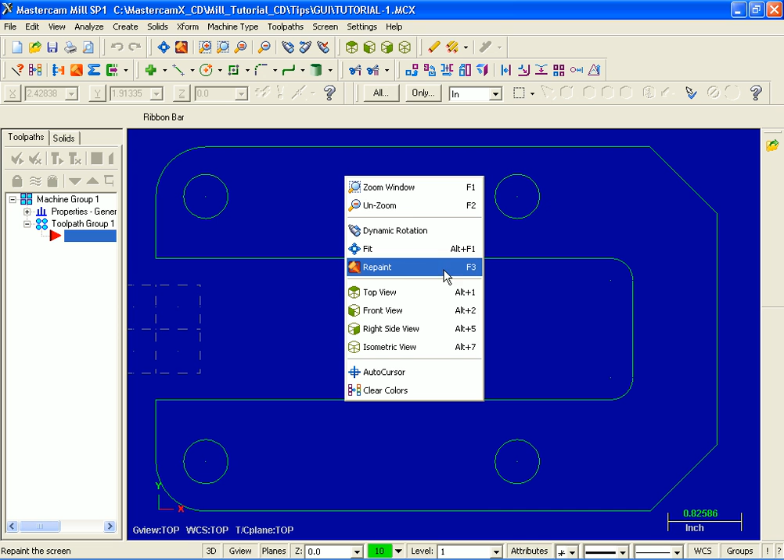Just above the blue graphics screen is the ribbon bar. Now ribbon bars activate when we move into many Mastercam functions.

Let's move to the top of the screen and review the menu bar and check out some of their contents. I'm going to move to the far left and click on File. Now the icons on the left match the icons in the toolbars.

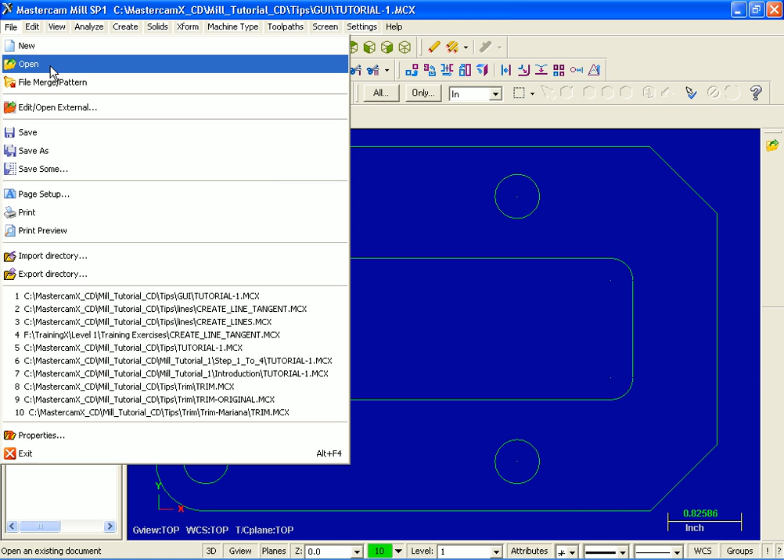I'm going to slide on down and pick Open. This is where we go to open up Mastercam part files. But down at the very bottom of this dialog box, Files of Type, I'm going to open up this drop down, and these are the different file types that can be read by Mastercam X, version 9, version 8 and version 7 Mastercam files, IGES, AutoCAD, Pro-E files and a host of other different file types. I'm going to move to the right and hit on the X for cancel, and then just hit it one more time to exit Open.

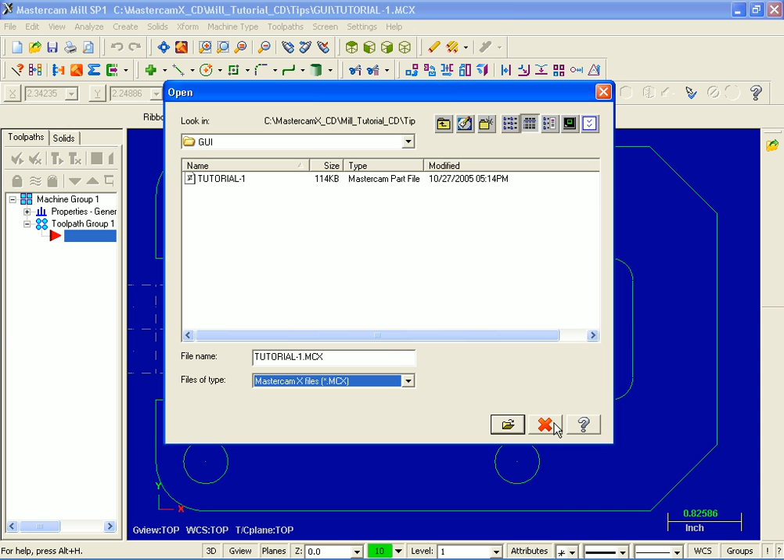Next door to File is Edit, and at the very top of the list is Undo, Redo, and by default Mastercam can save up to 2 billion undo, redo events. I think that should be enough. Down below is Cut, Copy, Paste, Trim, Break, etc.

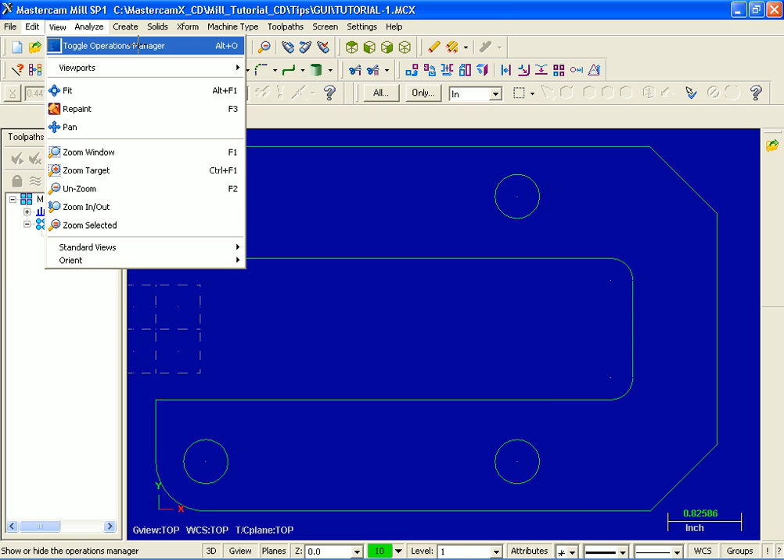Let's slide on next door into View. Now View contains a selection of zoom functions, and at the top a toggle switch to turn on and off the Operations Manager, or you can use the shortcut on your keyboard, Alt-O. I'm going to click on it, and as you can see the Operations Manager has disappeared. I'm going to click Alt-O on my keyboard to turn it back again. If you need to change the width of this window, just left mouse click on this right pane and drag it to the right. I'm going to click on it again and drag it back.

So this is the Toolpath Manager. Let's click over to the Solids Manager, and I'm going to click back to the Toolpaths Manager. Next door to View is Analyze.

What I'd like to do is find the distance between the centers of two of the holes on this part. I'm going to move on down and pick Analyze Distance. Now let's check out this first prompt: select a point or curve. What I'd like to do is analyze the distance between the center of this circle and the center of this circle over on the right hand side. So for this first prompt, select a point or curve.

What I'm going to do is move up to the Auto Cursor ribbon bar, that's what I'm hovering over right now. Now I'm going to open up this drop down, and I'm going to move on down and select Arc Center. Now as you can see the prompt has changed: select an arc. So what I'm going to do is move over to the left and select this arc, and it's snapped to the center of this arc.

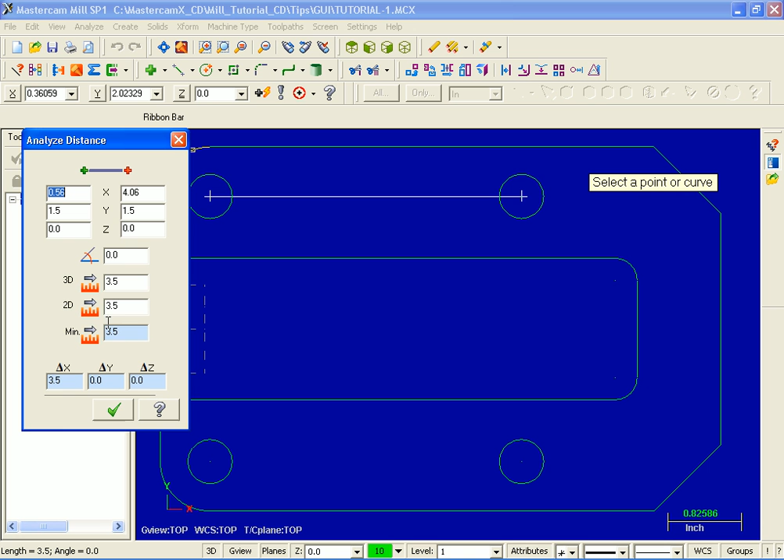Now over on the left in this dialog box is the two-dimensional length between the centers of these holes, 3.5. Let's move up now to the top left hand corner, and this X, Y, Z value represents the center point for the first arc that I picked, and on the right hand side this X, Y, Z value represents the center point of the last circle that I picked. I've finished with this dialog box, so I'm going to move down to the bottom and pick OK.

Now next along from Analyze is Create, and these are the geometry creation tools.

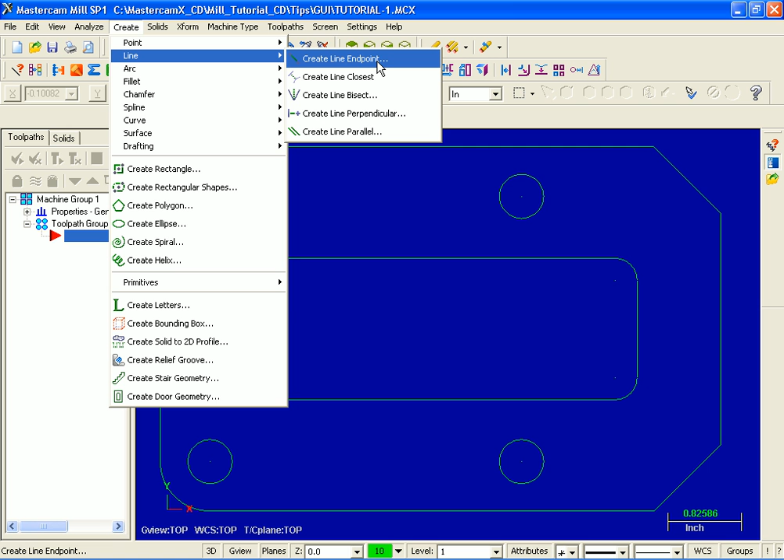Let's move down into Line, and there are five different options here for creating lines. So I'm going to click on the top one, Create Line Endpoint. Now this is the line ribbon bar that I'm moving along right now.

Now before we start to create the line, what I'd like to do is check out the prompt. Now what I can do is left mouse button click, hold it down, and move the prompt around. If I right mouse click, I can change the text size. I'm going to right mouse click again and take it back to large.

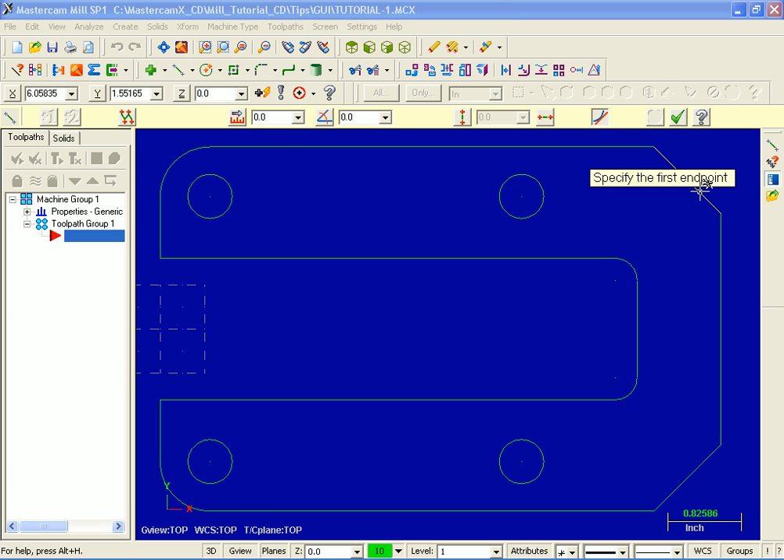What I'd like to do is draw a line from the center of this circle to the center of this circle on the right. So specify the first endpoint. What I'm going to do is move up to the Auto Cursor ribbon bar, and click on this icon for arc center.

As you can see, the prompt has changed to select an arc. I'm going to move over and select this arc on the left, and it's snapped to the center. Moving over, as I get closer to the center of this arc on the right, I've got a visual cue, that circle with the cross in the middle, meaning I'll snap to the center. I'm going to click, and there's our line.

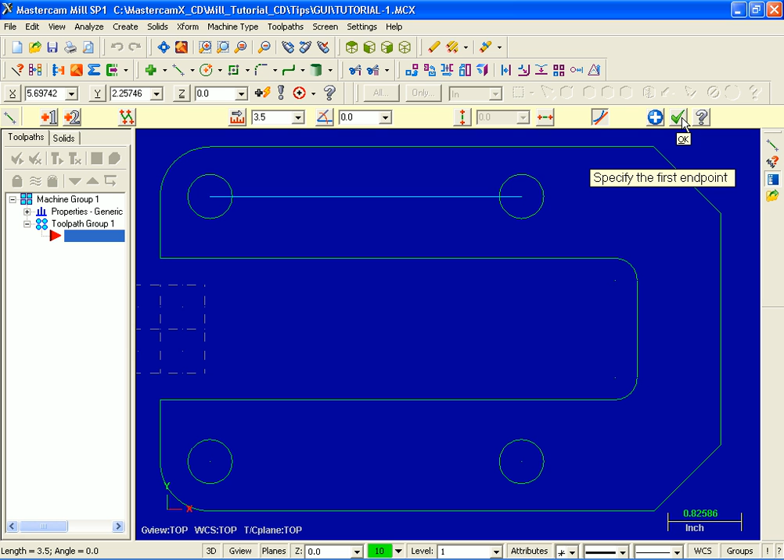Let's move up to the line ribbon bar. Now this button, the apply button, if I wanted to continue creating lines, I could hit apply. I'm done here, so I'm going to slide off to the right and click on the OK button, and there's our line.

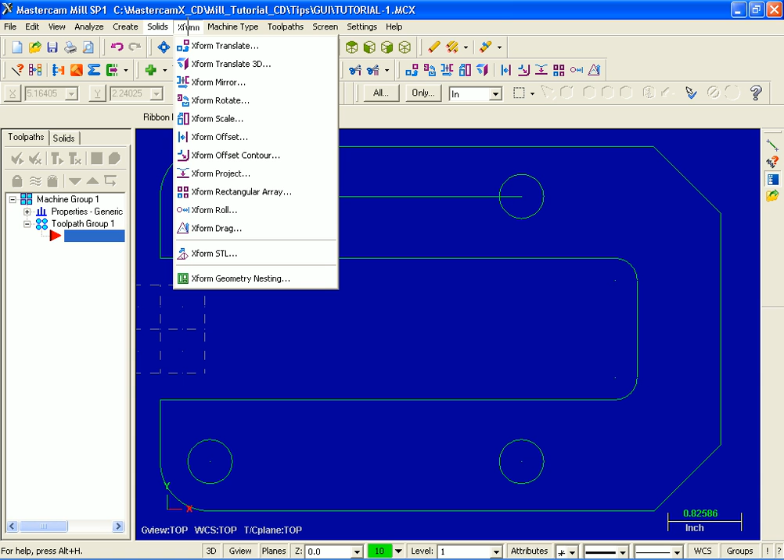Next to create is solids, and these are all the tools we can use to create solid model geometry. Next door to solids is XForm, and listed here are the tools we can use to transform geometry: translate, mirror, rotate, scale, to name but a few.

Next door, machine type. Now we can set up specific parameters for a particular machine tool, be it a vertical mill or horizontal machine. Let's slide over to the right into toolpaths, and these are all the tools we can use for creating toolpaths: contour, drill, pocket, etc.

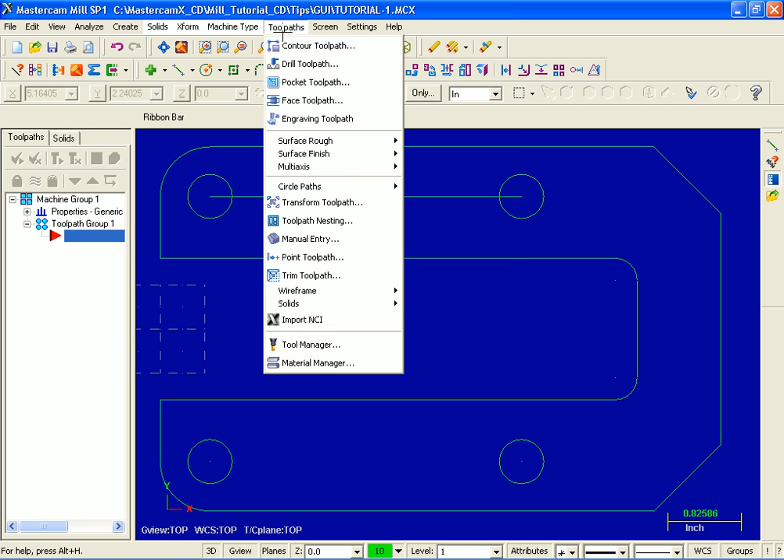Let's slide off to the right, and what I'd like to demonstrate now is how we can turn on and off the screen grid. I'm going to click on screen grid settings, or the shortcut Alt G. Over on the left you can see there's a check mark against visible grid. I'm just going to click on it to deactivate it. I'm done here, so I'll move down and click the green arrow for OK, and as you can see, the grid has disappeared.

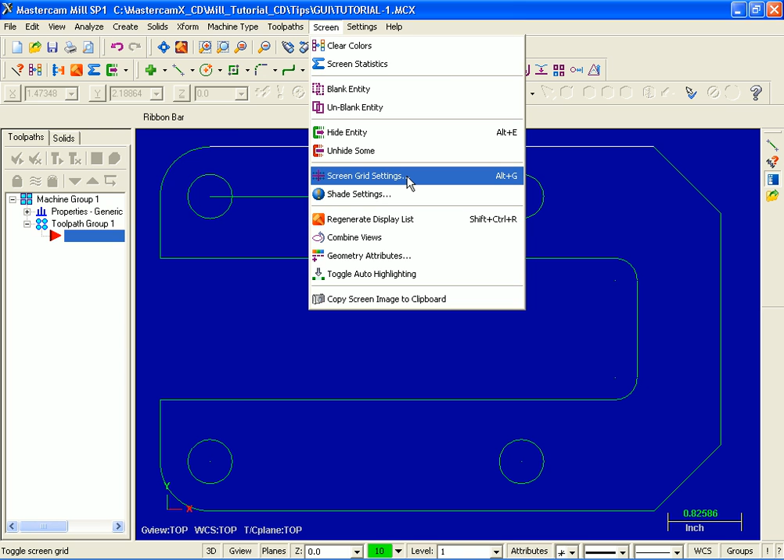Let's turn it back to life again. I'm going to go up to screen, move down to screen grid settings, and put that check mark back on visible grid. Just above it, active grid, it's deactivated at the moment, but if I activate it, that will enable us to snap to these grid points. One more thing before I leave here, I'm going to change the size from 1 to 3. I'm done, so I'll move down and pick OK.

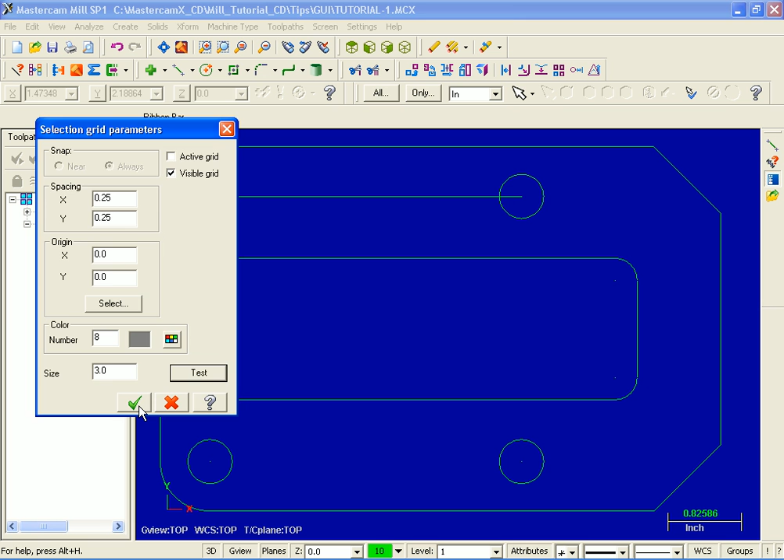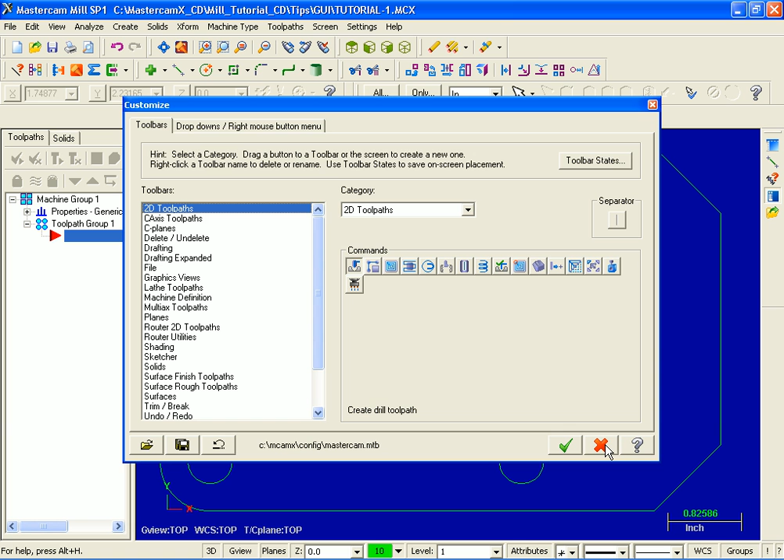Next on from screen is settings. At the top we've got configuration. I'm going to click on customize. Now this is where we go to create, delete and customize Mastercam toolbars. I'm going to go to the very bottom of this dialog box and hit the red X to cancel.

Now at the very end we have help, and there is a separate video just dedicated to help. Down below we have a selection of toolbar icons, and if you cast your eyes over to the right hand side, we have the MRU.

Now MRU stands for most recently used toolbar, which presently is vertically docked. If I hover over this top icon, you can see customize, that was the last function we were in, and down below create line endpoint, that was the one prior to customize, and then down below that, analyze distance. So this is the MRU, most recently used toolbar.

Let's move on up now, and what I'm doing right now is hovering over the Sketcher toolbar. Let's find out how we can turn on and off these different toolbars. I'm going to right mouse click over the toolbars anywhere. If we move down this list, you can see Sketcher has a check mark against it, it's turned on. I'm just going to click on it and it's disappeared.

Let's bring it back to life again. So right mouse click anywhere over the toolbars, and slide on down to Sketcher. I'm going to click on it, and there it is. We're back in business again.

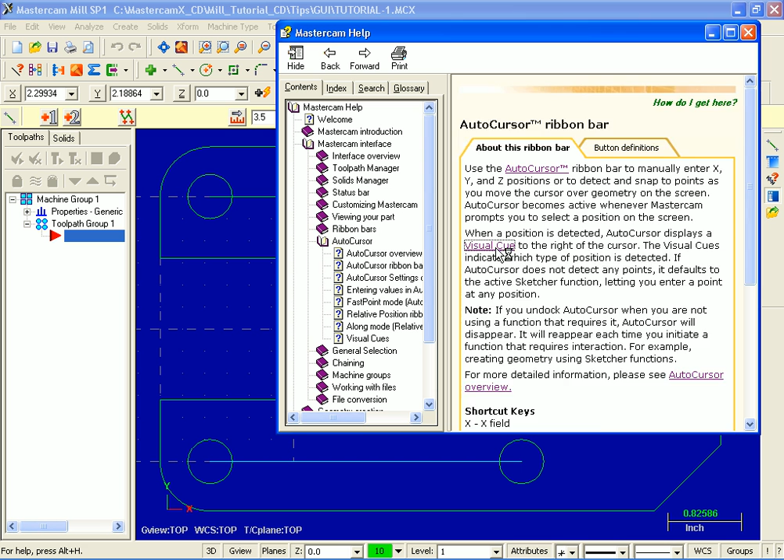Before we leave this line creation, I'd like to move up to the auto cursor ribbon bar and click on this question mark. Here we are in help, auto cursor ribbon bar help. I'm going to click on this link, visual cue, and scroll down to see the Mastercam visual cues.

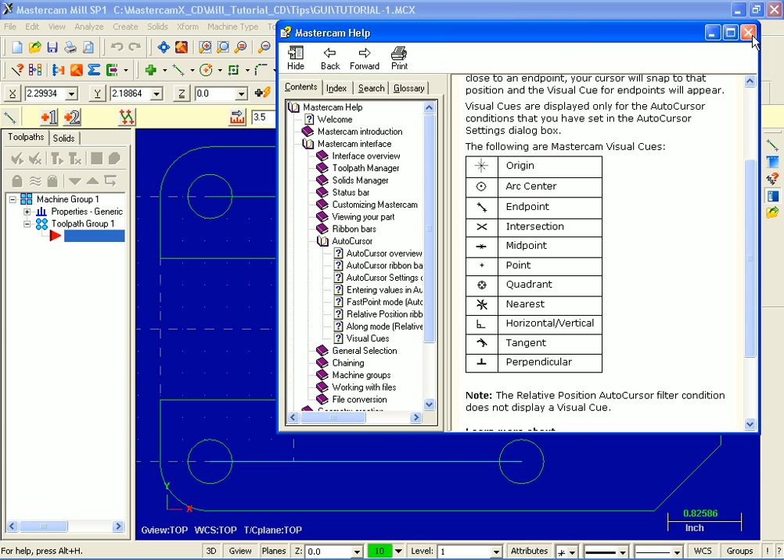This is the last one we saw, arc center. Prior to that, we checked out midpoint. Here's the visual cue for intersection. So don't forget, help is just a click away. I'm going to close this window. Now we've completed our line. What we've got to do now is move up to the ribbon bar and click OK.

What I'd like to look at next is the general selection ribbon bar, which I'm hovering over right now. I'm going to undock it, click on the left hand side, and drag it down into the graphics window. We use this ribbon bar to select entities in the graphics window.

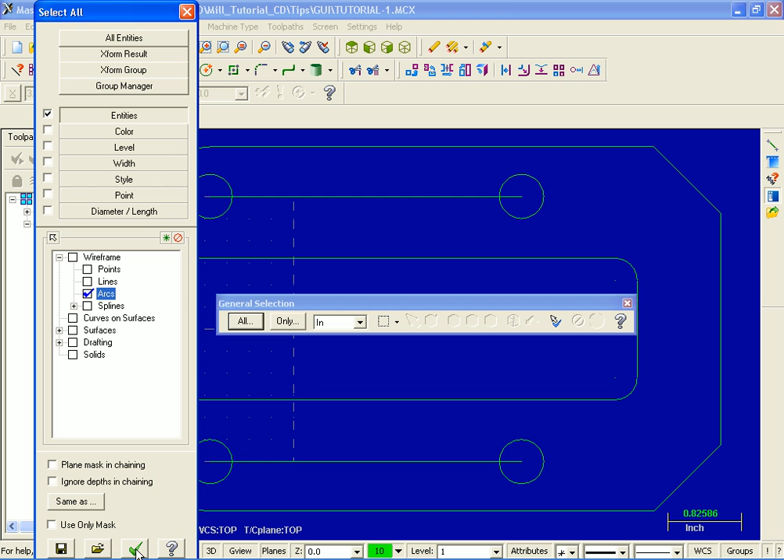Now I'm going to move to the left and select this All button. In this dialog box, I'm going to check mark entities, and moving down I'll put a check mark against arcs. To finish off, I pick the green check mark for OK. As you can see, it's selected just the arcs in my part. Now I want to delete these entities, so I'll move up to the toolbar and select Delete Entities.

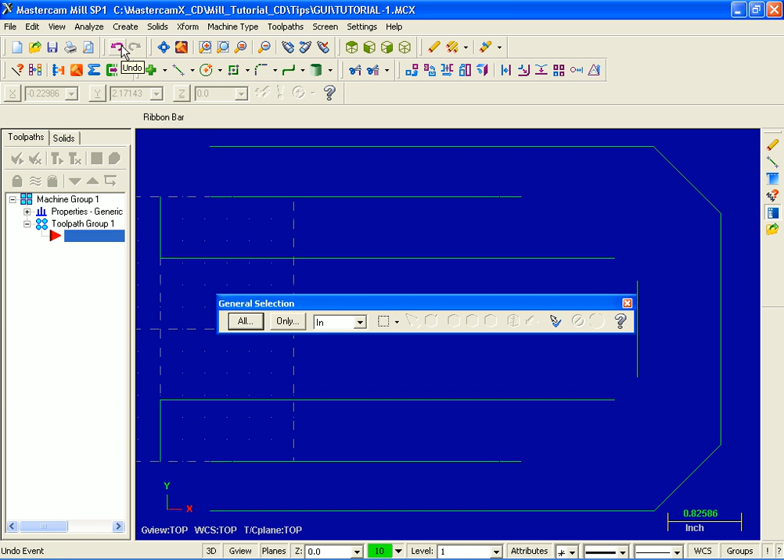To make them come back, I'm just going to go up and hit Undo. Now let's dock this back in its original place, and there we go.

I'm going to select Delete, and what I'm going to do is pick this entity down here, and pick this entity. Now maybe that last entity was a mistake. How do I unselect it? Just pick it again, so I only have two selected entities, as you can see they're in yellow. Now the next step is to move up and hit End Selection.

What I'm going to do now is move up to the toolbar and click on Undelete Entity. Once there's that line back, I'm going to hit it again, and we got both of those lines back now.

Let's move into Erase, Delete Entities again. Now select entities - I'm going to open up this drop down and pick Window. Now I'm going to move over into the left hand corner and pick a point and then drag. Before I pick this next point, take careful note of what entities are completely inside this window. I've clicked, and what have we picked?

The circle, the arc and the line - they were the only three things that were completely inside the window. We didn't pick this line, or the top line, because they weren't completely inside the window. I'm going to pick Done, End Selection, and let's do an Undo to get them back again.

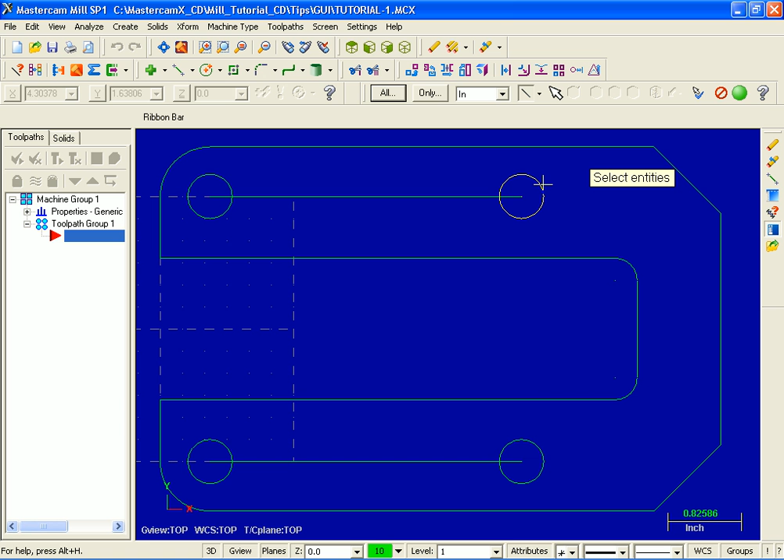Let's go into Erase, Delete Entities, and I'm going to open up this drop down and pick Single, and I'll pick this arc, and this arc - maybe that last arc was a mistake. All I do is pick it again, and all I have selected is two entities. I'm done, so let's go up and pick End Selection. I'm going to hit Undo, and there they are back again.

If you cast your eyes over into the bottom right hand corner, you'll see the scale and unit displayed, showing whatever you're working with, an inch or metric part, and how many units are displayed per inch or millimeter. This gives you an idea of the size of the part you're working with.

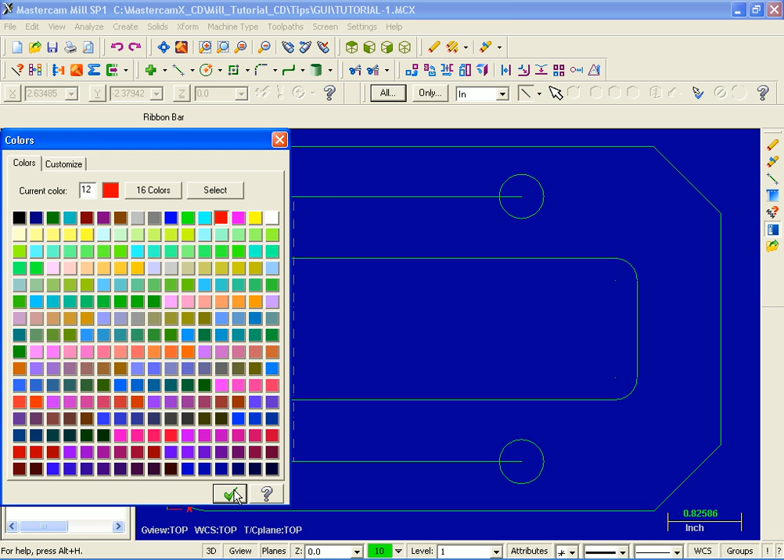Now at the very bottom of the screen is the status bar. We can access a variety of functions here: modify attributes, colors, levels, groups, etc. Presently the color is set to green. I'd like to change it to red, so I'm going to click on this green 10. Over on the left on this color palette, I'll select this square red, then go down to the bottom and pick OK. So from now on, any entities I create will take on the color of red.

Now that concludes our tour around Mastercam's interface. Thanks very much for watching.